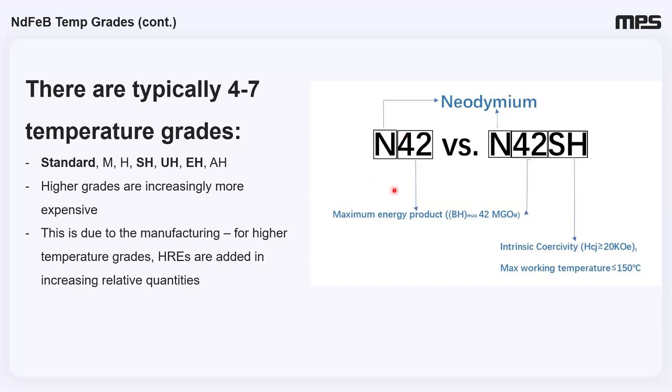And so these are very, very difficult to get a hold of right now. And so if you need to go to 150 degrees, you really have no choice but to limit the grade and limit the remnant field of your magnet.

I'm going to go through this one relatively quickly because I went over time on my previous presentation.

Okay, so that being said, what we're going to talk about is how can we adjust our design so that we can use a lower BR, and again, that's the remnant magnetic field, a lower BR magnet, and still get the resolution and meet all the requirements of our design. And as a starting point, we're going to talk about what a magnetic position sensor actually, quote unquote, sees.

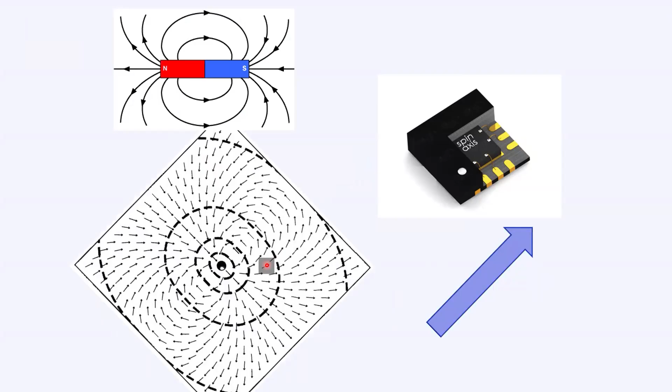If I rotate the magnet 45 degrees, then from this point here, I've got an arrow that points basically to the corner of the IC. So it's a 45-degree angle, and that's what we're seeing and what we're reporting. And that makes sense because we rotated the magnet 45 degrees, and now I'm getting a 45-degree output. Rotate another 45 degrees, I get a 90-degree output, and so on.

So that's what a sensor, quote unquote, sees. It sees the direction and the amplitude of the magnetic field or the magnetic flux density in space at the point where the sensitive part of the sensor is.

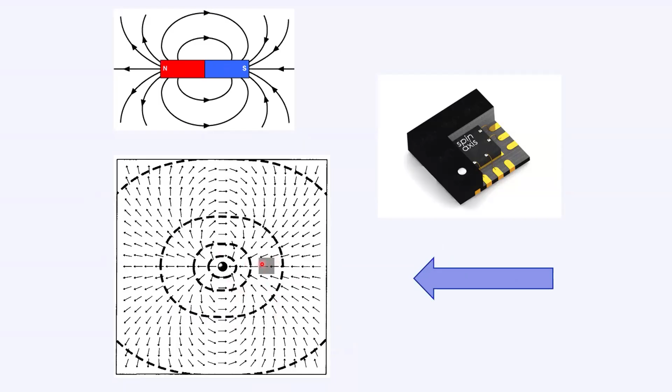What's going to happen as our magnet gets weaker? Because we can't get a hold of those nice heavy rare earth elements, and sometimes even the light rare earth elements, our magnets are going to be intrinsically weaker. So the amplitude of this field is going to get smaller. And now we're going to decide what are the different factors that we can adjust so that we can compensate for that overall weaker magnetic field.

And we're going to break them down into three basic categories: electrical, magnetic, and mechanical. What are the electrical changes we can make, the magnetic changes we can make, the mechanical changes we can make? Some of these are a little bit arbitrary. For example, increasing the magnet size, is that a magnetic thing or a mechanical thing? It doesn't really matter. I chose to put it under magnetic, but it's kind of a mechanical decision, right? It's just the size of the design. I'm just trying to keep things organized, but the specific category they fall under doesn't matter too much.

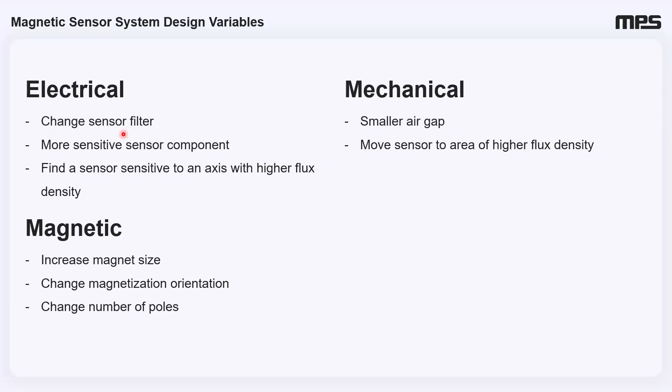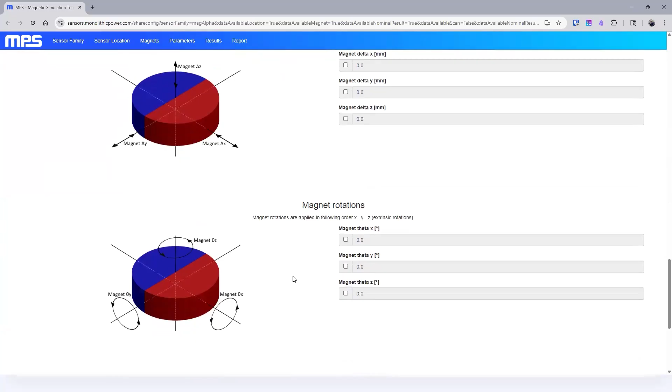We've got an online simulator tool, and we're going to be looking at that a lot during this presentation. But here is an example, and I've got a MA780 here with its cutoff frequency set at 2500. I can choose what I set it to, but here I've set it to 2500. I'll talk about more of these parameters later on in the presentation, so don't feel too lost here, but let's just launch a simulation. And I get a magnetic field of around 28.9 millitesla where I've got my sensor, and that means I've got a resolution of 8.94 bits.

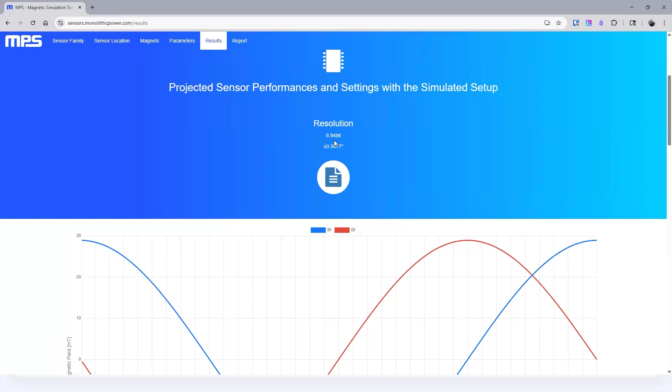So almost 9 bits of resolution. It's exactly what we expected, right? 29 millitesla of field, 9 bits. Let's take a look. 29 millitesla of field is here, and I've got my filter window set to 6. Hey, look at that, 9 bits.

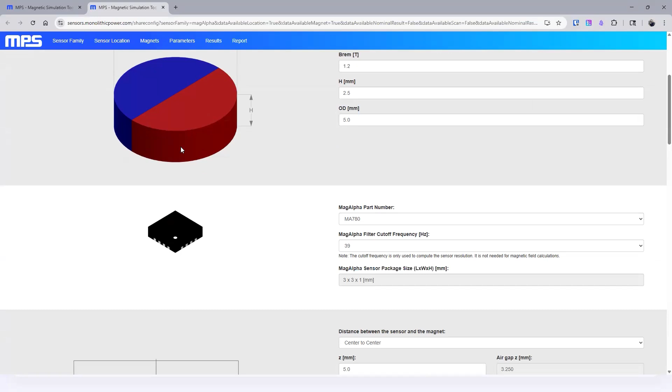If I want to set it to 12, way up here, at 29 millitesla I should get right around just under 12 bits of resolution. Let's check it. Again, that's just the simulator. I've got links saved. I'm using a 5 by 2.5 millimeter magnet, 5 millimeter diameter, 2.5 millimeter height magnet, MA780. Now I've got it set to 39 hertz, and I'm on axis with an air gap of 3.25 millimeters. Same as the previous simulation.

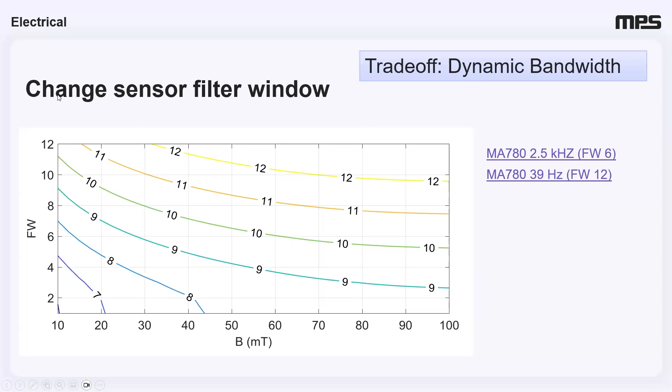So I should get the same field. I do, 28.9 millitesla, but now I've got 11.81 bits, and that's because I adjusted that filter window. So the simulator works, and if I choose the right part, it even tells me how many bits of resolution I get. So that is one of the things that we can do to compensate for lower field. We can change the sensor filter window.

Another thing that we can do is choose a more sensitive sensor component. For instance, MA730, this is a Hall-based sensor, to MA600A, this is a TMR-based sensor. And now I've got a very similar graph to the previous one, except it's just magnetic field versus resolution for a given cutoff frequency. And we see exactly what we saw in the previous one, which is that as I reduce the magnetic field, especially when I get below 50, our Hall sensors start to drop off resolution. We could compensate that by changing the cutoff frequency, but in this case, we're not using that as a variable.

So we drop off. Hey, look at MA600. This is a TMR-based sensor, and it's already got higher intrinsic resolution, and it doesn't drop off. It's very, very flat. That is an advantage of TMR. This is because Hall sensors are very white noisy. They have a lot of white noise. And it's also why filtering works so well for Hall-based sensors. Whereas TMR is mostly 1/f noise. So you get a very, very flat response over lower magnetic field. One of the things that we can do if we don't want to watch our magnetic resolution drop off with a lower magnetic field is change to a TMR-based sensor.

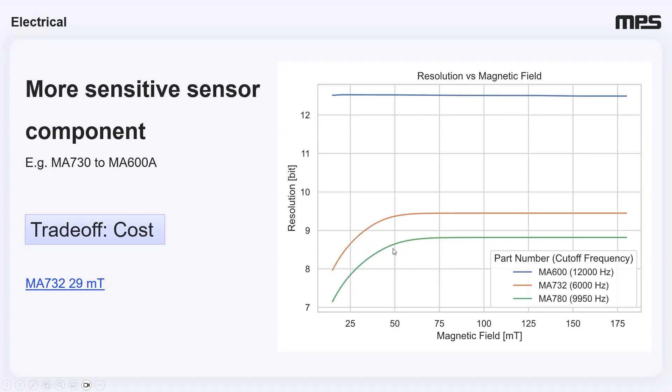The trade-off is cost. Hall sensors are a standard silicon process. We can throw it on the silicon with all the digital circuitry and everything else in a very standard process. TMR is not a standard process. It requires a second die, so it's always going to be a dual die solution with a specialized die for TMR, and it's expensive. We can basically assume that a TMR sensor is going to be 150 to 200% higher cost than a Hall-based sensor. But look what you get for your money.

I am going to move to the next one. Here, another electrical thing that we can do is change the sensing axis. I mentioned that most of our sensors are sensitive in the plane of the sensor. This is what we call a standard MagAlpha part. We also have parts that are so-called differential. They're sensitive in the orthogonal component to the plane of the IC. So here, these are all what we call planar Hall cells. They're sensitive in the Z direction. And we look at the difference of the field.

You can see if I've got a magnet here, here's the gradient field created by that magnet. It's going to create a magnetic field pointing down on one side of the IC and up on the other side of the IC. So that's a differential field. That is sometimes going to be a more sensitive axis than the planar field. There's a trade-off here when you go to differential, and that is you can't use differential in side shaft. If I try to put the differential in side shaft, everything's going to be pointed in the same direction, and we're going to get no output. These types of parts you can use in side shaft.

Let's take a look here real quick. The MA732, which is the standard type, in our simulator. And I'm actually going to go through from the beginning on this one. Let's start. If you go just to sensors.monolithicpower.com, you will see this page, and you can choose, do I want to look at a MagAlpha sensor or a MagVector sensor?

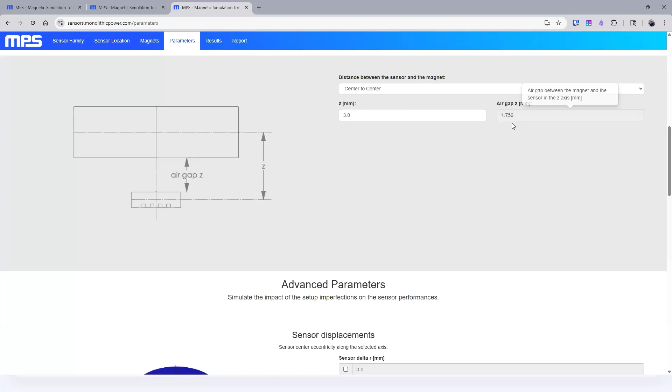What part number are we using, and what do we have its filter set to? 732 and 740 hertz. And then where does the sensor exist with respect to the magnet? So here I've got from the center of the magnet to the center of the IC 3 millimeters, which means that there's an air gap of 1.75 surface to surface.

And advanced parameters we could talk about in another webinar. We could do an entire 2 or 3 webinars on the advanced parameters. We're not going to worry about those today, but let's go down and simulate. And I get a 28.9 millitesla field at that position with that size magnet, which gives me 10.3 bits of resolution. That's with this type of sensor.

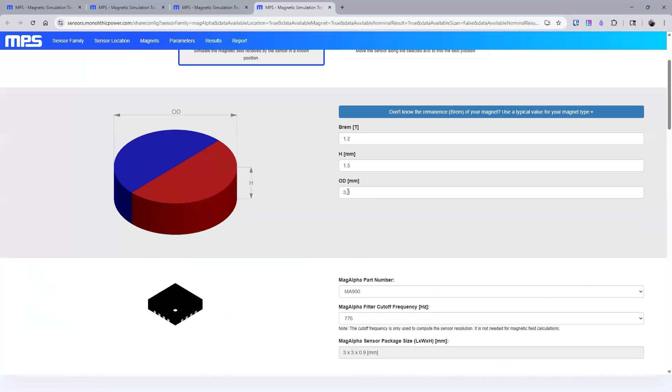If I change to a differential sensor like the MA900, we want to compare apples to apples here, so I'm keeping the same cutoff frequency. I've got the MA900 now, same thing, 3 millimeter by 1.5 millimeter height, 1.2 Tesla remnant field, 900, 776, same air gap. Let's go down and simulate it.

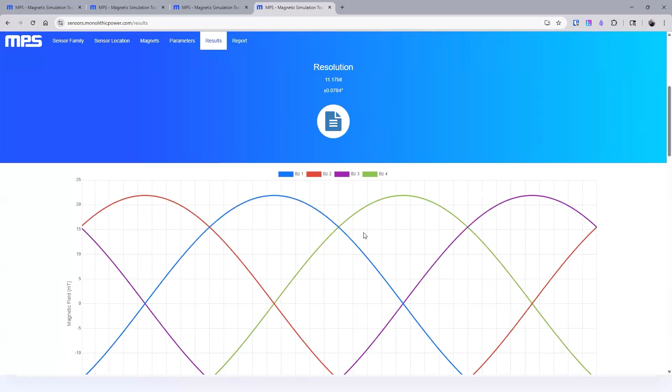And notice I now have 4 different magnetic fields, and every time I forget, when I do that, it's going to take me down to the definition of magnetic field because I highlighted it. But I now have 4 different sensors on this part, right? And they're each sensing 21.9 millitesla max. But actually, Z1 and Z3 are in opposite directions. So it's like having 42 millitesla, and 2 and 4 are in opposite directions. So I get the higher resolution.

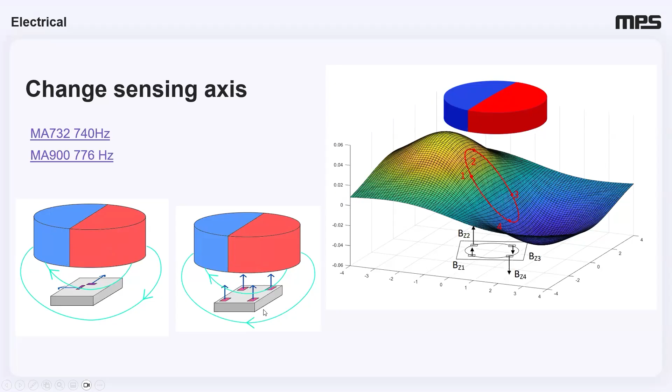11.17 bits. It's going to take me down there again because I highlighted it. I will never learn. So anyways, 11.17 bits, we get higher resolution because we went to differential. So another trade-off that we can make. The only trade-off here is that if we use this sensor, we're on axis only. We can never take a differential sensor and move it off axis, whereas with this part, we can.

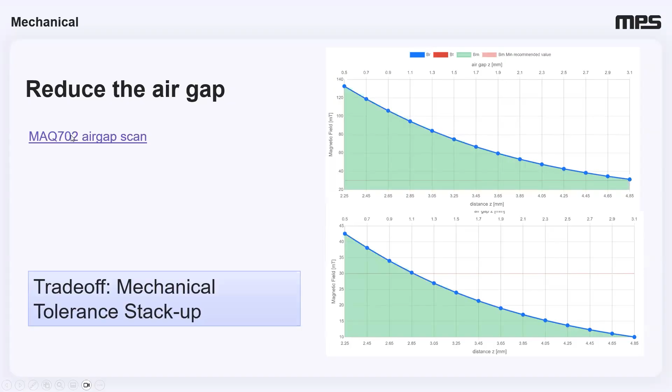All right, a mechanical adjustment that we can make. We can reduce the air gap. That's the simplest mechanical adjustment that we can make. So here's an MAQ702. It will illustrate something that we can do in the simulator where instead of saying I know the sensor position, we can scan a sensor position.

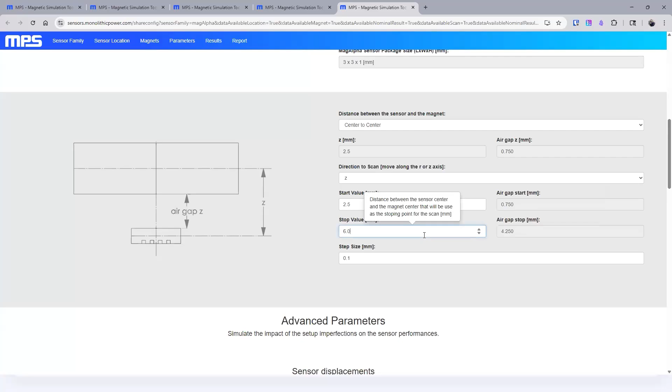So here I've got a ferrite magnet, 385 millitesla remnant field, 5 by 2.5 millimeter magnet. I've got the MA702, which has a set cutoff frequency, by the way. You can't choose anything. And I'm going to scan my air gap from 0.75 to 4.25. And I can do that. And it's going to give me the entire scan here.

And you can see that if I had a neodymium, a high BR magnet, I'd probably be okay with air gaps of 2.65 millimeter, maybe even 3 millimeter. I'm not with a ferrite magnet. It's got the lower BR. And so I've got to reduce my air gap. If I lower my air gap, that field increases. And you can see that with a little over a millimeter of air gap, I get into a field that's okay.

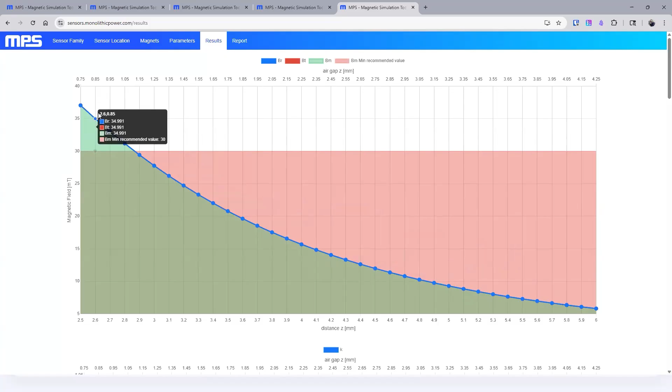This actually tells me, for the 702, we recommend at least 30 millitesla. If I have an air gap that's 1 millimeter or smaller, I'm above that 30 millitesla. So reducing the air gap is a really, really easy way to exponentially increase the magnetic field, or the magnetic flux density, that we see at the sensitive part of the sensor.

Another mechanical thing that we can do, and this is very specific to... so far we've talked a lot about on-axis applications. Here's an off-axis application. Something that I commonly see customers do when they're off-axis is place the sensor in a spot that has poor flux density. So let's take a look here.

I've got a magnet. This is my magnet here. I'm going to use my laser pointer to make it a little easier to see. I've got a magnet that is about 5 millimeter diameter and about 2.5, 3 millimeter high. And these are the ISO lines of the flux density.

So you can see that if I'm in this area on axis or up here on axis, it's quite nice. If I'm going to be off axis, I want to be axially centered on the magnet. If I get down here into what I call the corner placement, it's a very, very weak magnetic field. We're wasting a lot of the flux density that this magnet is providing because we're in an area where it just doesn't exist very well.

And we're going to use a scan to illustrate that again. I'm going to scan over here with an R air gap of 1.5 millimeters, and we're going to scan from 6 millimeters up to 0 on the Z. So 6 to 0 to come up into here. And when we do that, we're going to see how much the field increases.

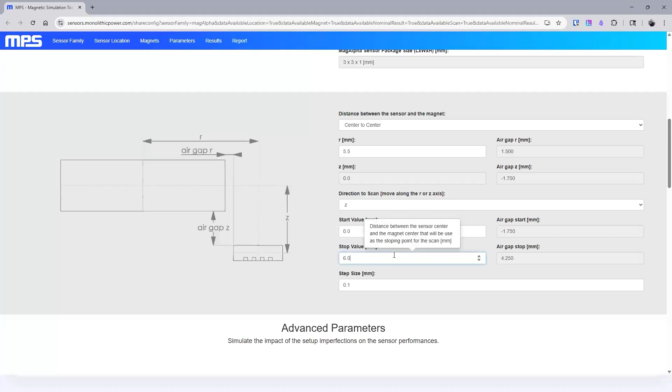We're scanning basically along that red arrow that I showed. And you can see when I'm down in that corner, I have very, very low flux density. And as I decrease my Z, essentially going towards the axial center of the magnet, the flux density gets higher and higher and higher. Now, something interesting we're seeing here.

We're seeing that we've got two different magnetic fields that are being measured. That is something that's specific to being side shaft. Our radial field is going to be different than our tangential field when we're side shaft. Again, something that I have covered in other webinars and in the data sheet. This is called ellipticity, and it can be compensated by our sensors.

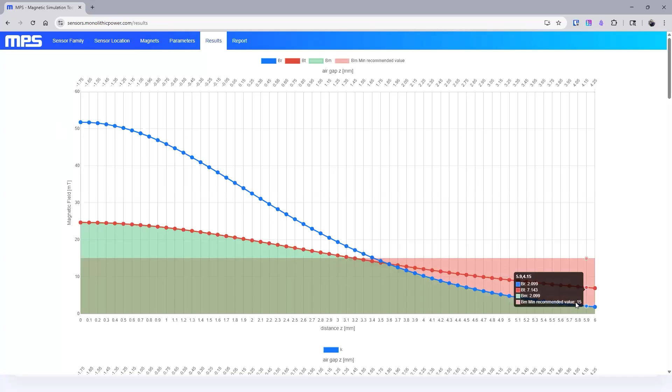But the important thing here is just to see that we go from low field to a significantly higher field as we move from down here up to here. Best place to be is axially centered.

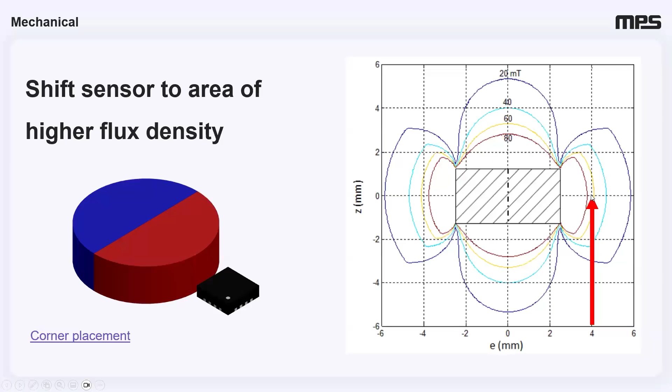All right. And then another relatively obvious thing that we can do is increase magnet size. So I'm going to compare a small neodymium, a 1.2 Tesla BR neodymium that's only 2.5 millimeter by 1 millimeter height, with a ferrite that's 5 by 2.5 millimeter, about double the size. Well, it's more than double the size because it's volume, but double the diameter and about double the height.

So let's take a look at this 2.5 by 1 millimeter magnet. Neodymium 1.2, 2.5 by 1. I'm going to use the MA710 again. It's arbitrary, it doesn't matter.

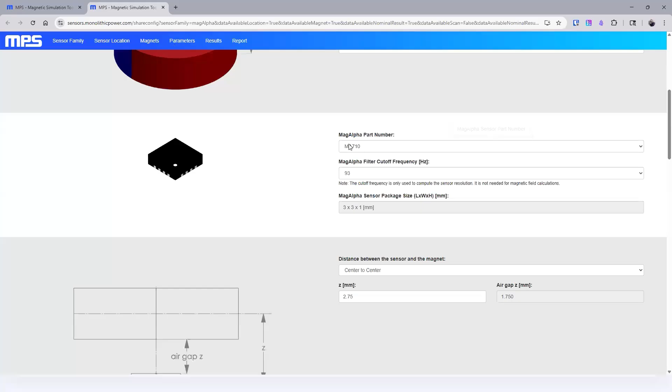Also, if you're using a competitive sensor, which I certainly hope you're not, you can still use the MPS tool. You just ignore what the part number is. The magnetic field density, the field strength, is going to be accurate regardless of what part number you choose. The part number and the cutoff frequency are only used to tell you what resolution you would get for a particular mechanical setup. So you can use other sensors and still use this tool.

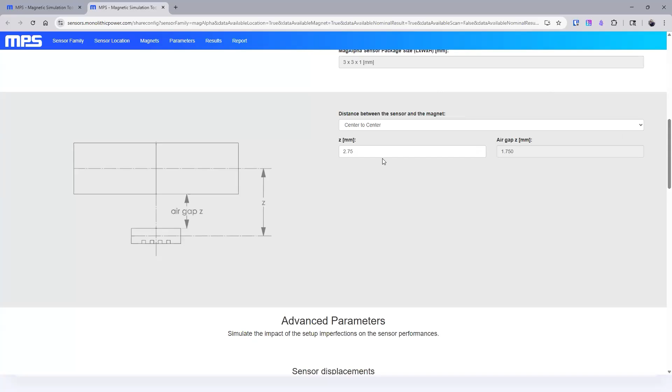Here we're going to have a 2.75 center to center, 1.75 air gap. So 2.75 millimeters from the center to the center. And we run the simulation. Let's see what we get. We get 17.8 millitesla of field, for a resolution of 11.2 bits for this particular sensor. Let's remember that, 17.8 millitesla with our small neodymium magnet. We're going to increase that to a ferrite of 5 by 2.5 with the same part.

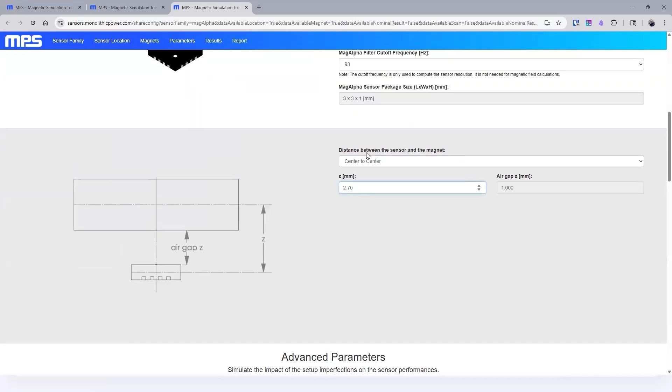Here, the way we know that we're using ferrite now is we only have a 385 millitesla remnant field. 5 by 2.5, same 2.75, and we get more magnetic field: 32 millitesla field for about the same resolution. All we did was increase the size of the magnet and use a much cheaper magnetic material, easier to get a hold of, and the trade-off is obvious. The trade-off is it is just larger. That is the only trade-off.

You actually also get an unexpected benefit when you do this, though. When you go from a smaller to a larger magnet, you can have more mechanical tolerance stack up. So let's say you've got run out on your motor, or you've got lateral play where your sensor exists. The same amount of run out or lateral play with a larger magnet will cause relatively less effect on INL or linearity. If you have a small magnet, a correspondingly smaller mechanical play will cause that same INL. So if you can do it, a larger, cheaper magnet is better. It's just, can it fit in your design?

And then another thing that we can do with our magnet is we could change the magnetization orientation. So I've got two different magnets here. These are subtly different magnets. This one is diametrically magnetized, or diametrally magnetized, some people say. It means that I've got a magnetic moment that goes across the surface of the magnet like this, in this direction. That's diametral. That's a typical magnet that we would use for a target magnet.

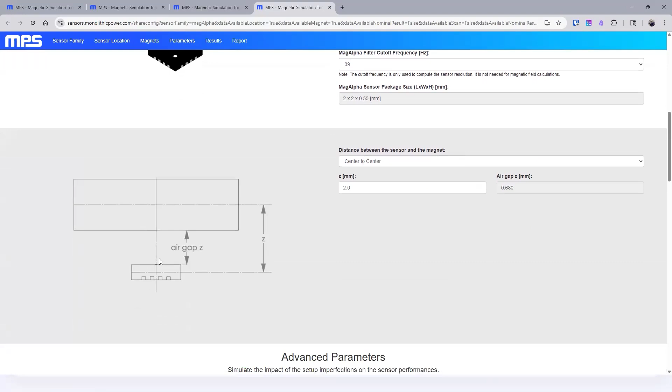So this was diametral. We're using a ferrite magnet, size of 3 millimeter diameter, 2 millimeter height. We're using the MA782, again, arbitrarily chosen for this one, and a 2 millimeter center to center, so air gap of 0.680. We're going to run the simulation, and I get 32.7 millitesla of field.

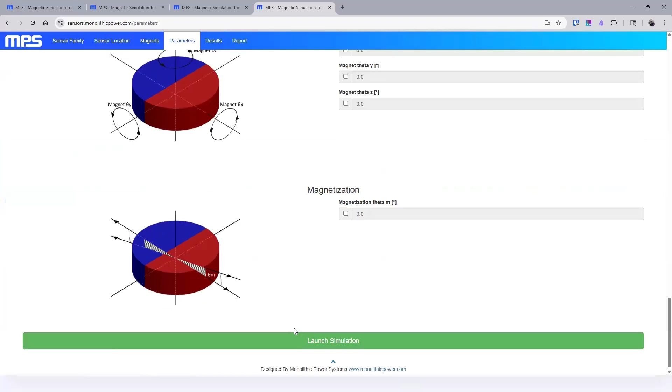By the way, how do I know what magnet I chose? Well, I would know it normally because I choose the magnet back over here. I would choose in the shaft, and I would choose this cylinder magnet instead of this 2.5 cylinder. But in case I forget when I do my simulation, I can always go to this report tab over here. And you go to the report, and this tells me, oh, it's a cylinder magnet. Okay, and the cylinder magnet means diametral magnetization. So we're in the shaft, cylinder, 0.385 Tesla, 39 hertz cutoff frequency.

It tells me everything I need to know about my application here. 32.7 is my magnetic flux density at the sensitive part. This report also shows me a URL that I can use to get back here. This is what I've been using this whole time. These URLs, I can copy it, and then I put those in my presentation, and that's what I use.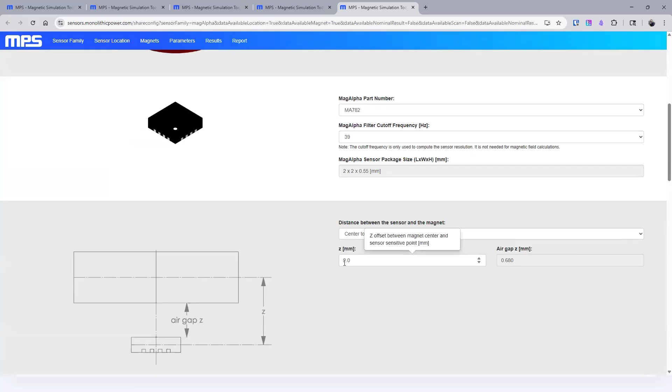Here's one that does the same design, but with the biaxial. So it's the same exact design, 0.385, 3, 782, 0.680 air gap. I'm gonna run the simulation. I get higher field, 40.3 millitesla. And the way that we know that this was biaxial is if I go to the report, it says half cylinders axially opposed. So higher field because of the biaxial.

What's interesting with biaxial magnets is you'll get a higher field when you're close, and as you go farther away, the field dies off faster than it does with a diametrically magnetized magnet. So these are commonly used not just to get higher field strength for a very close sensor, it's also used commonly if you've got multiple axes, maybe you have a bunch of motor shafts that are all close together and they all want to have sensors, and you don't want axis to axis to interfere with each other. Use a biaxial magnetization. The field drops off very, very quickly, and it won't interfere with a nearby sensor magnet setup.

All right, and lastly, we can change the number of poles. And unfortunately, I have to go through this one really, really quickly because I'm running out of time. But we change the number of poles. We can change from 2 poles to 4 poles to 8 poles.

The trade-off here is that you lose absolute angle detection. If I have a dipole magnet, I can turn off my device, rotate the magnet to any arbitrary position, turn the device back on, and I know exactly where I'm at because the field has a 1-to-1 match with the angular rotation. If I go to a multi-pole magnet, for instance, here's a two pole pair magnet.

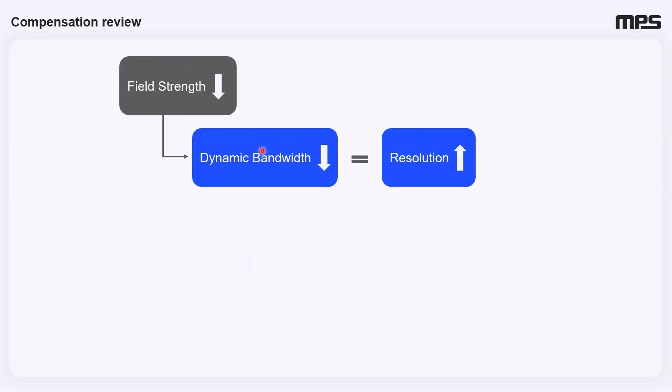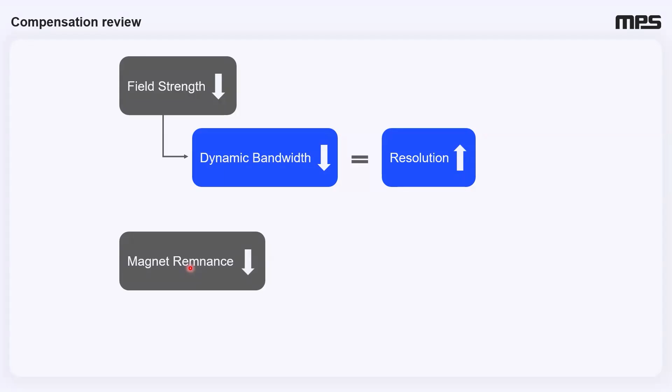What we're going to do is lower the dynamic bandwidth, which increases the resolution. That compensates for that lower field strength. Same thing, magnetic remanence, which is what causes the lower field strength. When we have a magnet that has a lower magnetic remanence, I want to keep the field strength at the sensor the same. I need to increase the magnet size or decrease the air gap. These are the 2 most important things that we can do to immediately compensate.

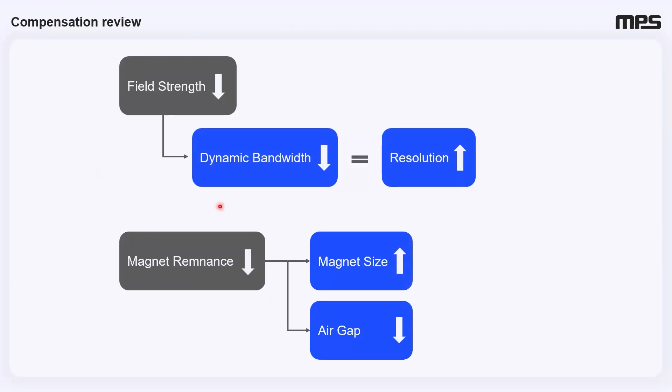And then we move on to all these other different options: a more sensitive sensor component, a change in the sensor filter, finding a sensitive axis with a higher flux density, smaller air gap, moving to an area of higher flux density, and again, use that sensor simulation software to play with it and see what happens. You can watch this stuff in action as you scan across different zones, or run different simulations, increasing magnet size, changing the magnetization orientation, changing the number of pole pairs.